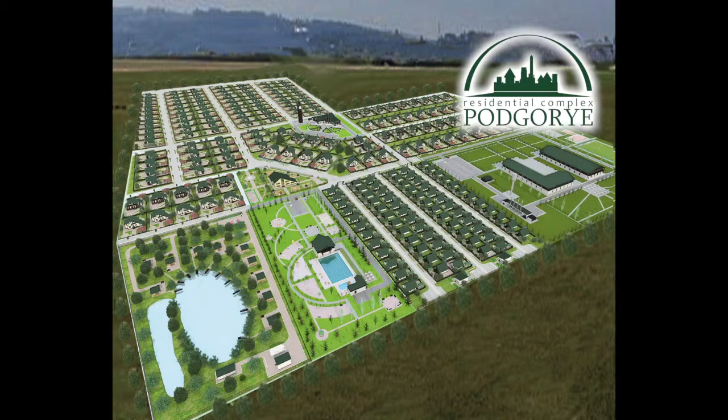Our project Podgorye is a new standard of comfortable living in one's own home on his own territory. We have all divisions that cover all units from zero cycle till the manufacture of factorial houses, construction, engineering, finishing works and also landscape design.

When designing the construction of the house and entire infrastructure, we assume the responsibility for every task, carefully designing every inch of our territory. We would especially like to emphasize that our team endeavors to organize, build and implement the housing set to turnkey habitation with the privatized plots.

We have the opportunity to change the life of everyone who wishes to take up the true values of nature and to fully develop our children, to spend leisure time in comfort, preferring sports, and have a sanitation center near the house.

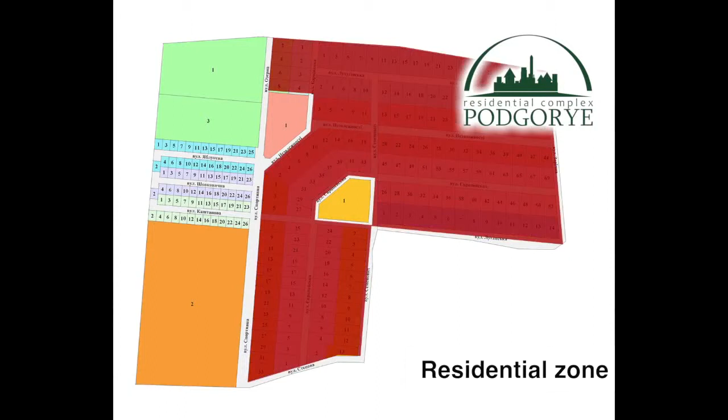Residential zone: our team has planned, according to the approved concept, to implement in this project the construction of 198 cottages of 3 types, with areas starting from 85 square meters up to 150 square meters, where every building will be located on 100 square meters.

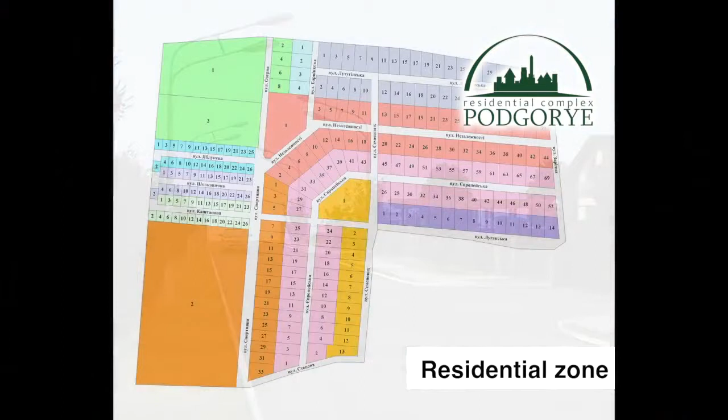This will be an area of permanent residence, which will be equipped with all the necessary attributes for comfortable living. Administrative area: the residential complex Podgorye is a high-tech complex.

In the center, we plan to build an administrative utility containing different social services: a pharmacy, a hairdressing salon, a post office, shops, a travel agency, etc.

This zone will also include such vital objects as a boiler house, an industrial water well with a tank tower, an electrical substation, and, of course, 24-hour support manning.

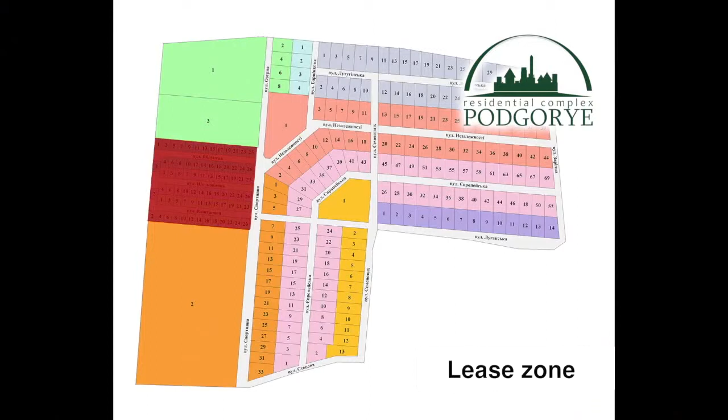Lease zone: there is also a lease zone in our project. It represents small-sized house construction that can be rapidly assembled, with total area up to 50 square meters on 300 square meters, with a total amount of 76 pieces.

We plan to let these houses for temporary use by people tired of the city fuss and dreaming about a comfortable weekend in the countryside oasis.

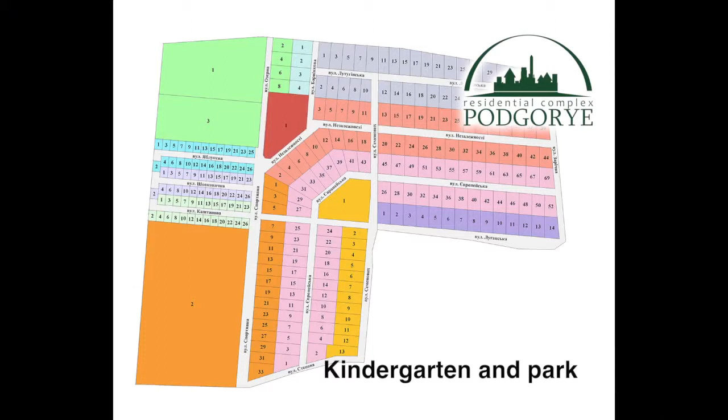Kindergarten plus park: we also expect to create a park in the area which will be located next to the kindergarten for 100 places. This park will be a comfortable and safe place for all the children, and it will also help to resolve the problem of how to enroll children in preschool institutions.

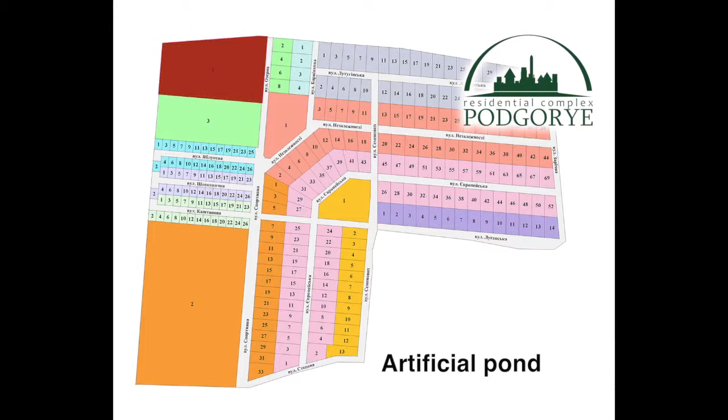Artificial pond: the project concept includes installing an artificial pond for fishing and recreation. The lake was designed in order to farm elite types of fish and is designed for those who appreciate healthy and comfortable leisure activities offered by organizers.

We also plan area beautification around the pond. It includes planting trees and the construction of a dozen small houses for the possibility of temporary staying and having a rest. Seasonal swimming pool:

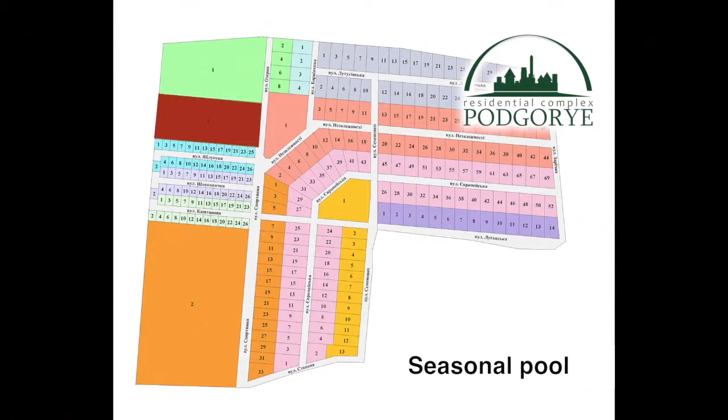the construction of a seasonal swimming pool with playgrounds and a recreation area will become the most visited and favorable place for relaxation and sanitation of all Podgorye residents and visitors.

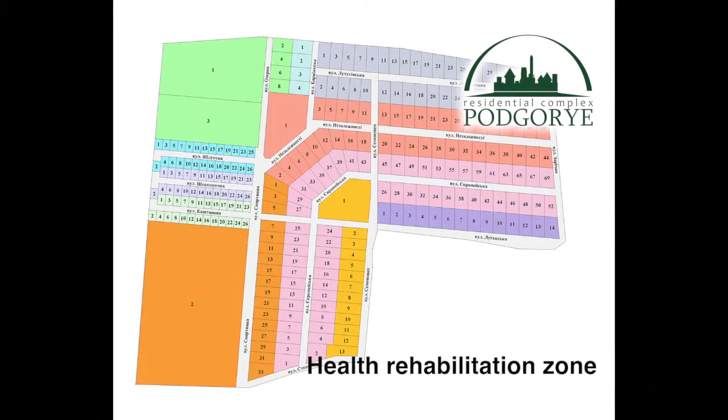Health Rehabilitation Zone: the sports area will be one of the most interesting parts of the campus. 600 square meters of land, which is dedicated to this area, will include a fitness center, a rehabilitation zone and a medical center.

It is also important that there will be playgrounds, tennis courts and a football field in this area. The sports area will be fascinating and become the most important contribution to the health of both children and adults.

SIP Technology Description: for the implementation of the project, we propose the SIP technology – Structural Insulated Panels. Structural insulated panels are one of the most common building materials.

SIP technology of low-rise building, 1 or 2 floors, has been used in our region only recently, but such construction is already very popular worldwide. This is due to the unique thermal insulation and moisture-resistant qualities of the materials. It is warm in such a house even in the most extreme cold, and in the summer it is cool.

A house built using SIP technology meets all the requirements of modern life: environmentally friendly, durable, reliable and affordable.

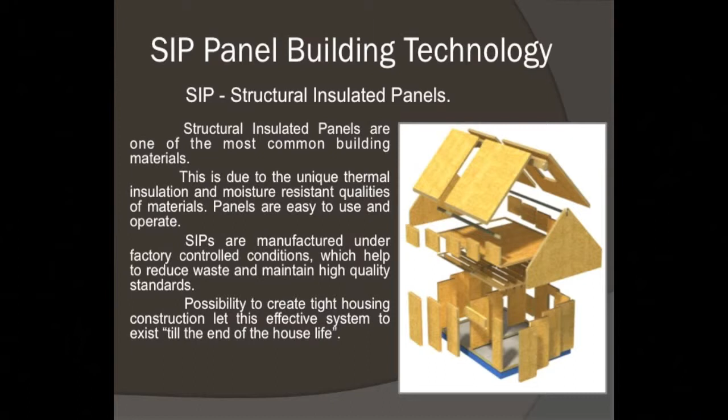To minimize the cost of the project, it is advisable to purchase one's own equipment for the production of SIP panels. The above-mentioned technology allows avoiding wet processes, enabling construction work to be conducted all year round in a quick and easy way.

The organization of our own production makes it possible to significantly reduce the cost of new construction and restoration of damaged property. First of all, SIP panels allow easily modifying finished buildings and building out new areas for existing houses.

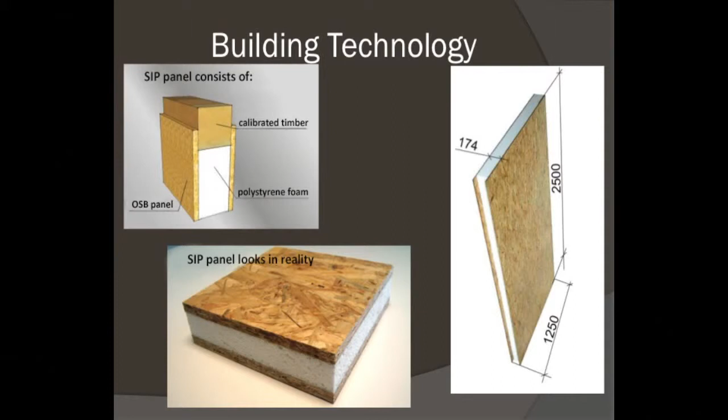SIP technology can be successfully used when replacing damaged structures in multi-story housing. Through such technologies, it is possible to reconstruct objects with significant damages, which is, of course, a high priority in our region nowadays. There is an agreement with the associations of SIP technology in Ukraine and the Russian Federation for the supply of equipment. The estimated payback of the project is 2 years with the implementation of the final product.

The organization of SIP production would solve a lot of problems, because with the help of such technology it is possible to reconstruct different objects and build new ones, solving many social problems in the construction industry with a significant economic effect.

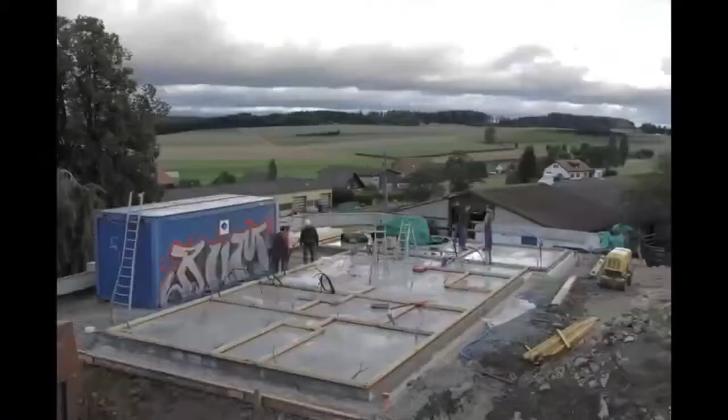Accordingly, it means new jobs, trainings, and rise of the potential and development of new technologies in the region. Assembled with the highest accuracy at the factory, the building is mounted already in location without the use of heavy machinery, any time of the year.

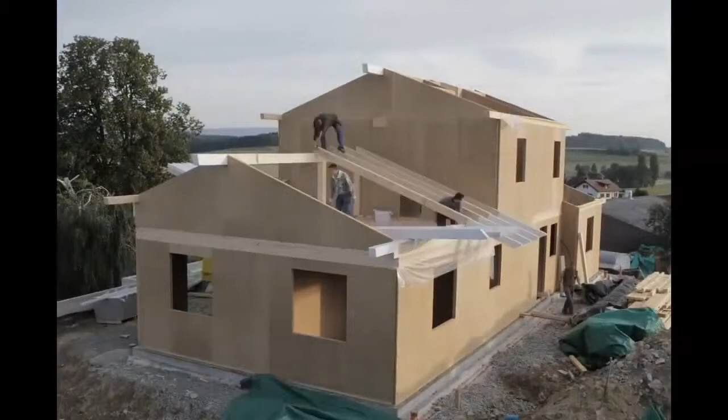We would like to highlight that our company is not just about designing the house. We are making design, landscaping, and infrastructure implementation for the whole project. For the house to be carried out rapidly, efficiently, in a short period of time and at reasonable price, it is necessary to design the zero cycle carefully, with groundwork for pipelines and networks at the same moment. For us, going to the object means performing all work stages at the same time.

The house is the basis of human existence. It is a place where you can escape not only from weather, but also find one's own living space. A cozy house is a special area - the place where you want to come back, where you can recover mental tone and feel comfort and secure. A comfortable home is not only a space filled with furniture and other objects, but is primarily a metaphysical concept. A house is a reflection of the tastes and character of its inhabitants, family traditions, and the connection between generations.

Promo campaign. We have elaborated an extensive promotional campaign designed to cover a wide audience, starting from young families with children who are interested in houses with low prices. Meanwhile, environment and developed infrastructure are important and very positive factors in the choice of location to live.

Also, such a project can be a real delight for mature families who are interested in a high standard of living and maintaining their health at a stable level. This group of clients would be interested in fitness and medical centers, recreation areas like parks and lakes, and again, ecology of the location is a strong plus.

And of course, the elder people. For this group of customers, every object on the territory would be absolutely essential. First of all, the house itself is made of environment-friendly materials and is situated in a green area. The entire infrastructure is already in the territory - shops, pharmacies, and the necessary administrative buildings are located in the same block, which greatly simplifies the lives of these people. A big advantage will be wellness and recreation areas, lake and park.